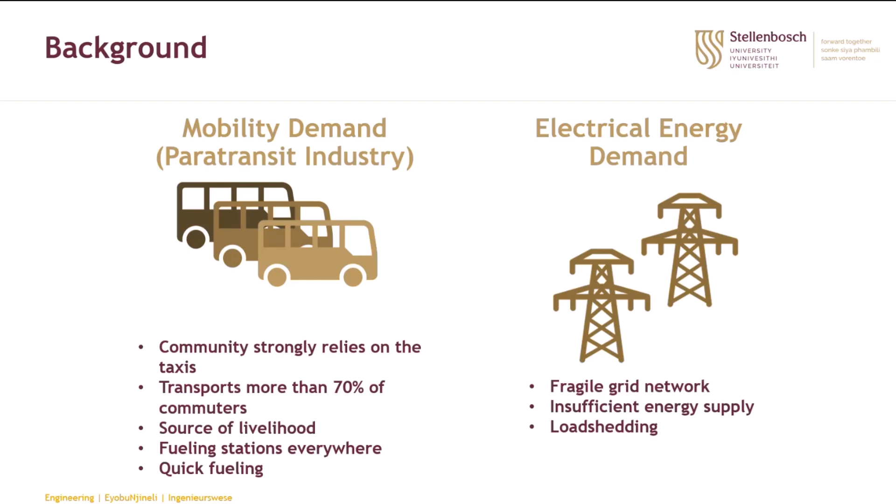When we consider electrification, these two systems that were once independent of one another now become dependent on each other through chargers specifically.

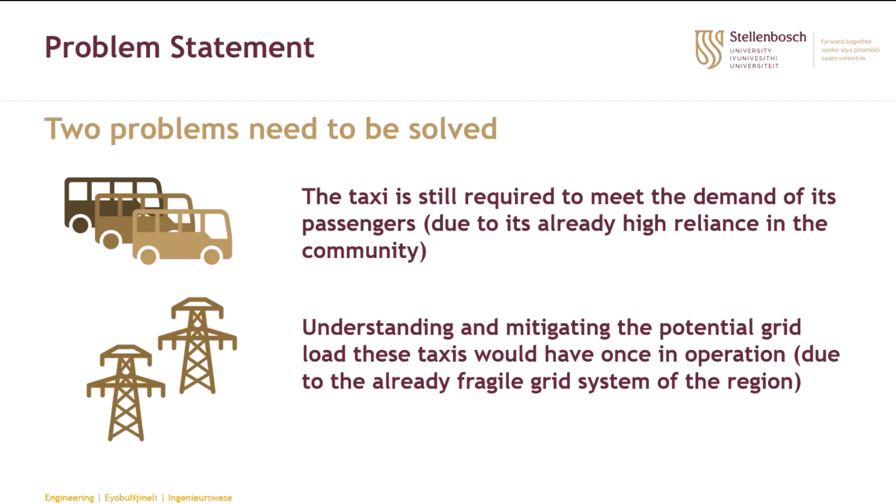This leads us to two problems that need to be solved in the electrification of paratransit. The first is that the taxi is still required to meet the demand of its passengers, because of its high reliance in the community. The second problem is understanding and mitigating the potential grid load these taxis would have once in operation, because the grid network is significantly fragile.

This leads to the PhD research question: what are the challenges and opportunities when considering the interdependence between mobility and electrical energy supply in the electrification of the paratransit industry?

So how are we going to answer this question? I've identified four key objectives. The first is to perform a literature survey to establish what has already been done in literature. The second objective is to develop and introduce a methodology for analyzing the viability rate of the electrification process, and to develop a simulation tool capable of this.

Having this viability rate included in the actual simulation. The fourth objective is to evaluate various factors that could affect such a system in electrification, such as number of chargers, charging rate, charging locations, and scheduled versus unscheduled mobility. Lastly, we derive conclusions and policy recommendations on what should be considered when the electrification of paratransit eventually goes forth.

This leads to chapter 2, which was published in a variety of articles and conference papers, and is summarized in this portion. It achieves objective 1, which is to perform the literature survey.

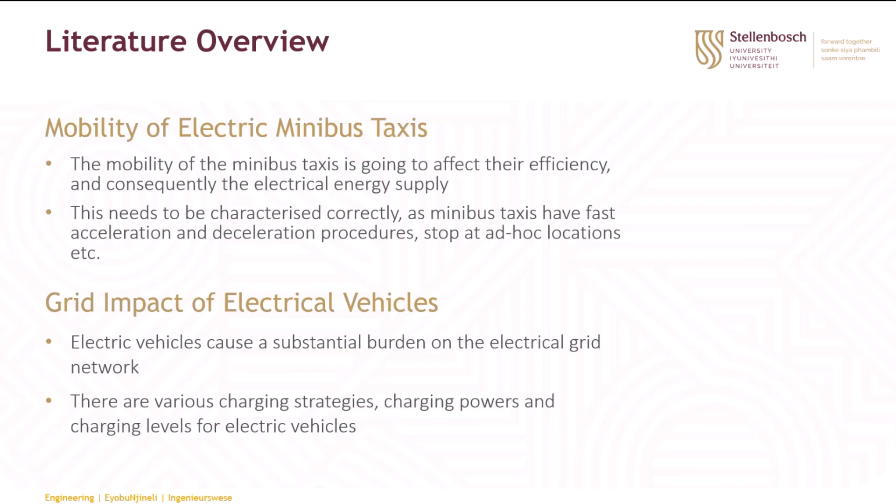If we have a look at existing simulations of mobility and grid, this is just a summarized version of everything. But there's been various studies that have focused on each of these key parameters, including scheduled versus unscheduled, different charging locations, different EV penetrations, etc. However, in these studies, not all of them are considered, and it's mostly just focused on one specific area.

However, what is key from the literature that I found is that the whole process of traveling and charging needs to be simulated in order to obtain a more practical prediction of what it will actually look like in the electrification process. Another key point is that the analysis for one country does not translate well to another country, and therefore it's important to do country-specific simulation.

So in doing the literature survey, two research gaps were identified. The first is that the analysis was largely done for the global north and not for sub-Saharan Africa. The simulations out there do not accurately represent the unique behaviors and complexities of the paratransit industry that we see in sub-Saharan Africa. So new methodology is therefore required to account for this.

The second gap is that investigating the integration of grid and mobility is quite a complex task. Some factors are included while others are not, such as number of chargers, charger location, charging behavior, etc. And so there needs to be a simulation tool that is capable of simulating electric paratransit.

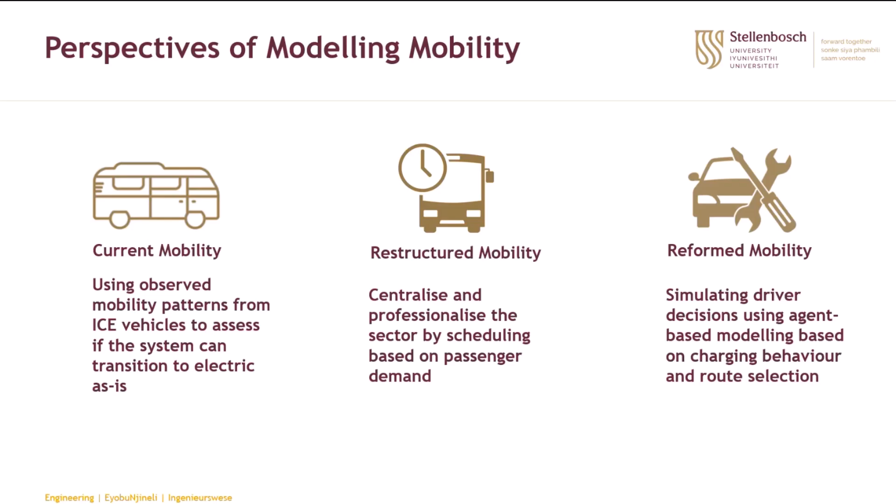So my specific research focused on the current mobility analysis. What happens if we take the system as is and convert it to electric? How does that hold up and stand? And the way we did this was through the introduction of what we call the vehicle day.

It's important to know that the taxi's behavior changes from day to day in the distance and the time that it travels. And this is completely different to buses, which have fixed routes and times in which they travel. So what we do with the vehicle day is, instead of just treating everything according to the trips that take place, we rather have a look at the overall day that the vehicle travels.

However, because charging takes so long, we can't just have the day be a normal calendar day from 12 o'clock until 12 o'clock. We rather shift the vehicle day from 4 o'clock until 4 o'clock of the next day to account for the home charging in the evenings. And so this vehicle day concept is able to contain the whole mobility of the taxi, or the whole movement of the taxi, within a given day, instead of just having the normal trip-specific information.

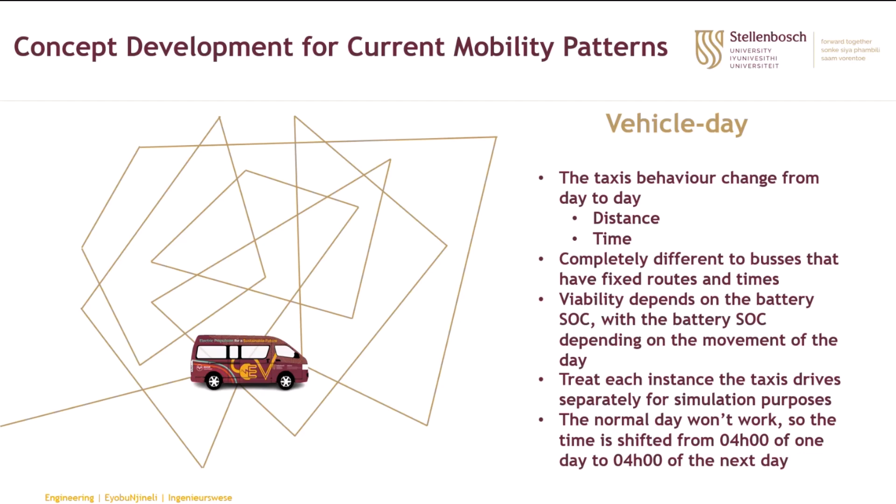However, when we have a look at this further on a more macro level, we see that there's actually multiple vehicles active on a single day. And because of electrification, these vehicles end up sharing a resource which is the number of chargers, which becomes scarce. And so these vehicle days are not entirely independent of one another, but become dependent on each other based on the number of chargers at a specific location. And so we term this grouping of vehicle days that drive on a specific day as a fleet day.

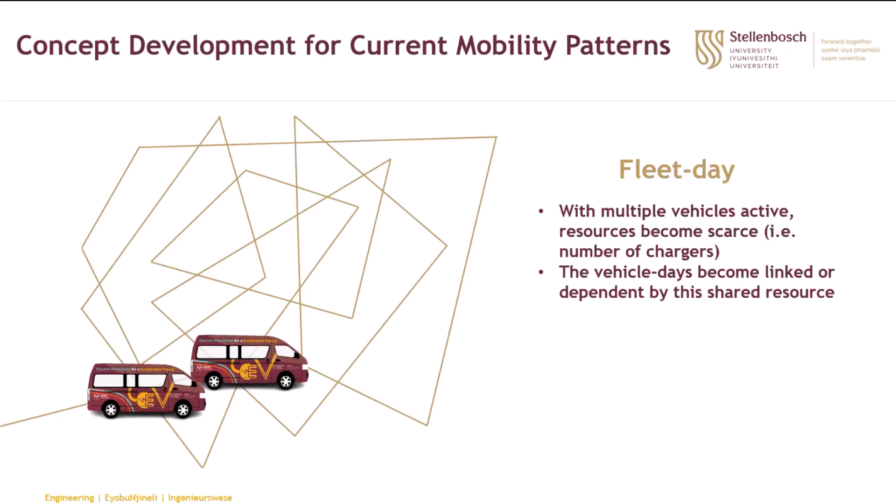And what the fleet day allows us to do is determine the grid impact that we can expect from these electric minibus taxis.

So when we come to the data specifically for this, we had received data for 17 minibus taxis that were tracked over a month.

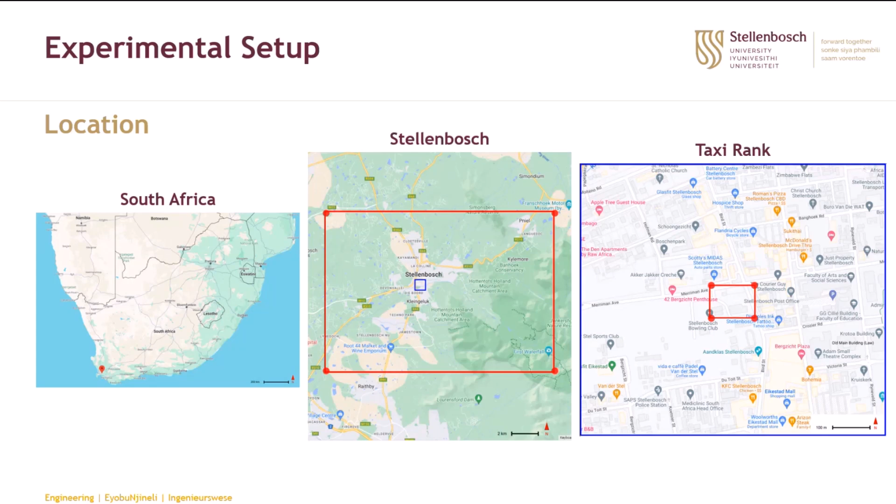With regards to the data from the 17 taxis, if we just included the operational days in terms of weekdays, as well as excluding the days the vehicles were not driving, we ended up with a total of 290 vehicle days. Simplifying that further, we ended up with a total of 220 vehicle days.

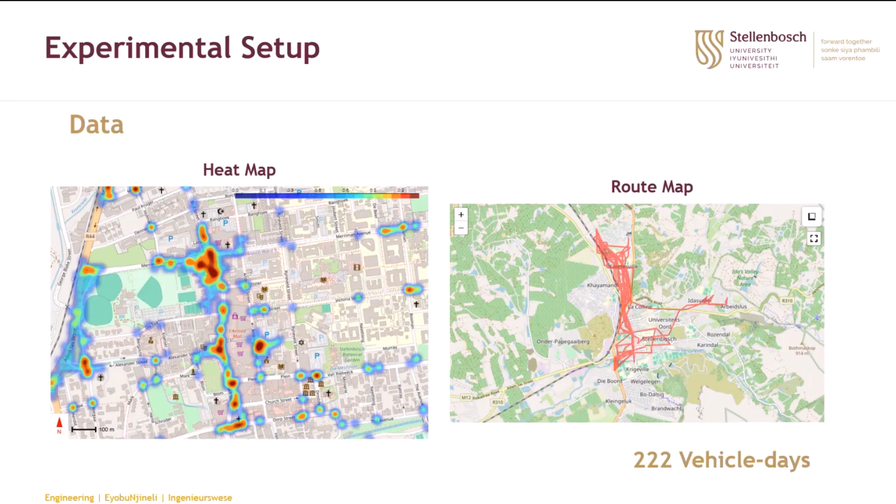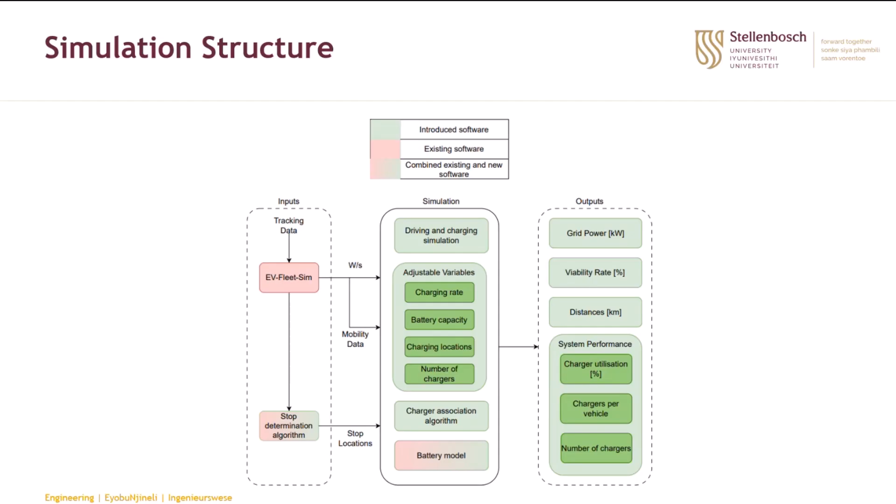And then I made use of an existing battery model with some variations within the simulation. And on the right you are able to see the various outputs.

Some of the outputs, when you have a look at it, the two key ones are the grid power measured in kilowatts, as well as the viability rate in percentage, which just means how viable is the transition going to be - how many minibus taxis will be able to be converted to electric, in terms of a percentage.

Then some other smaller metrics we're able to determine are distances, in how far they can travel in a given vehicle day in terms of kilometers, as well as the charger utilization in percentage and number of chargers per vehicle. So this then leads us to the results.

The results were published in mainly two journals, being the Energy for Sustainable Development Journal, as well as the African Transport Studies Journal. And this work completes objective 4, which is to evaluate various factors of the system.

So in the next slide, I'm going to show you what the simulation looks like. But before that, it might go very quick, so I want you to just notice that the SOC of the vehicle starts at 100%.

What we have over here is the various vehicles actually driving and charging on a given vehicle day, or on a given fleet day, with each line representing a different vehicle. The downslopes represent the vehicle driving, with the upslopes being the vehicle charging. What is shown here is the SOC of the battery throughout each iteration.

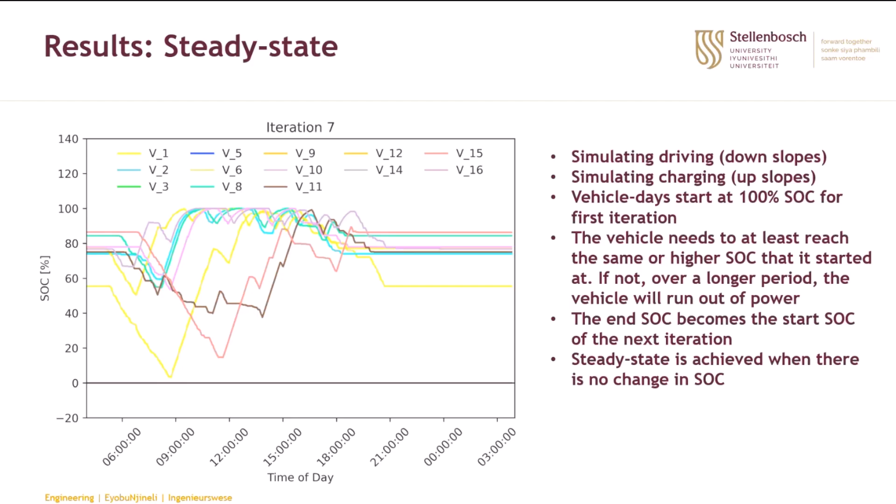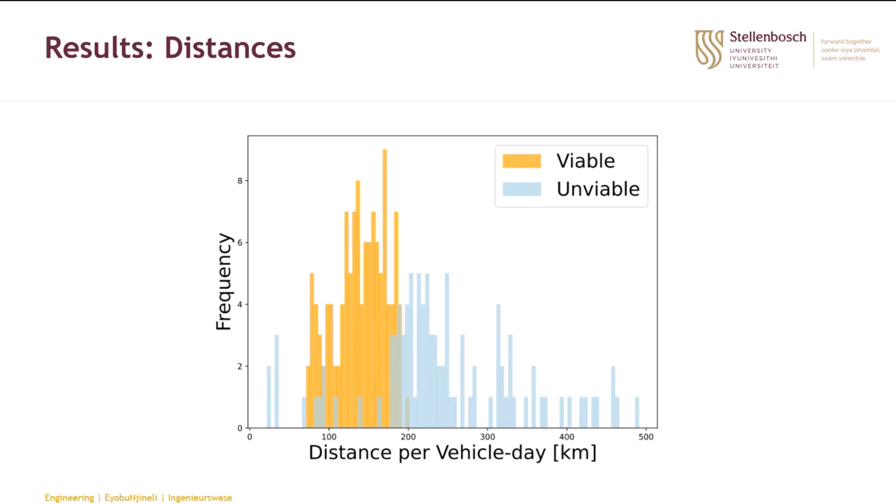One of the other outputs of the simulation is the distances. This is just an example of what the distances actually look like, where the viable vehicle days are shown in orange and the unviable vehicle days are shown in blue.

From the simulation, we get two types of distances. The first is the distance that can be traveled in a vehicle day given sufficient charging, and the other is the limit of the actual battery being 140 kilometers that a vehicle can travel in a single trip without needing to recharge.

Then quickly, if we just have a look at the current actual electrical grid situation in South Africa, for increasing numbers of EVs, we see a pretty alarming scenario.

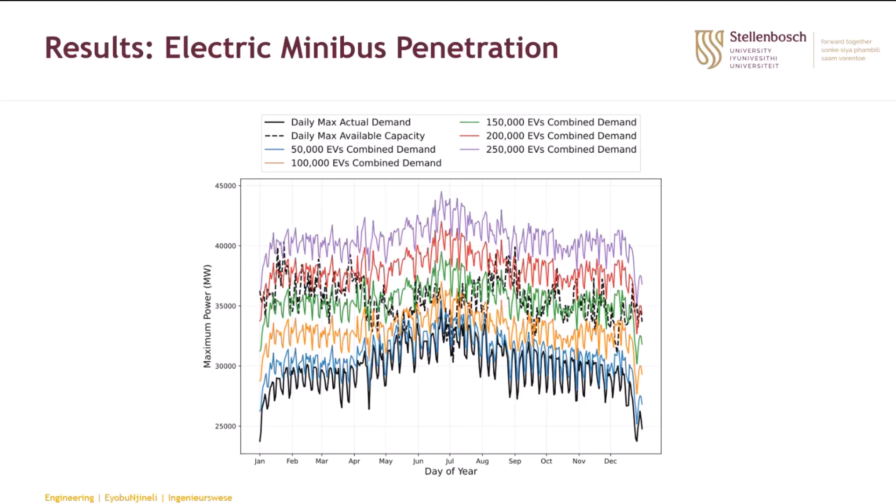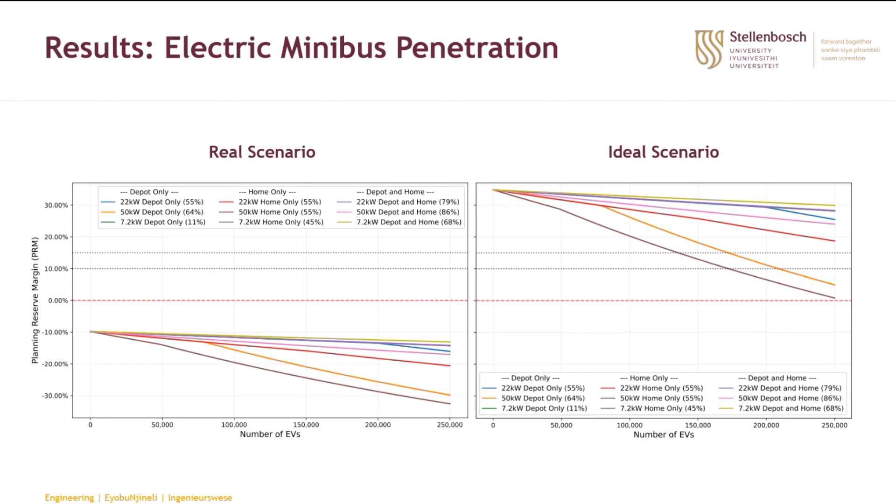So for the actual scenario in South Africa, we would not be able to have any electric minibus taxis on the road. However, if we take the ideal scenario where the installed capacity matches the actual capacity of South Africa, we see a very different story: slow and medium charging is pretty sustainable. However, fast charging, seen by the brown and orange, will actually quite substantially negatively affect the grid.

This was an interesting side note: we tested what happens if we increase the battery capacity, and we found that increasing the battery capacity does not provide as much benefit as including home charging. So rather than trying to get more out of the battery, we should instead install home chargers.

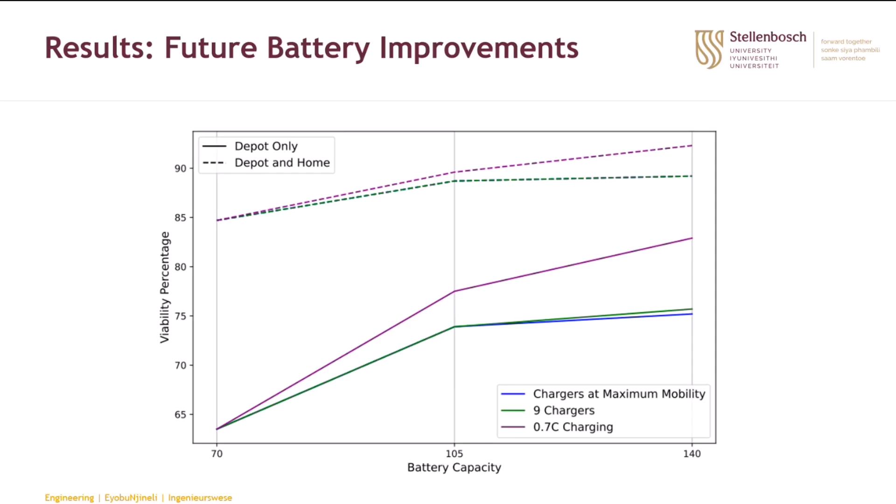So one of the key discoveries of the first part is that the mobility of the taxis would need to change in order to achieve higher viability rates. That led us to chapter 5, the restructured mobility: what happens if we change the vehicle's behavior to a more scheduled nature? This was published in the Journal of Cleaner Production and still addresses objective number 4.

With this introduction, we added to the methodology and framework through the use of a vehicle trip. The vehicle trip allows us to ascertain the perceived passenger demand of the taxis based on how long they stopped at a specific location, with the assumption that if the taxis have stopped, there are no passengers in it, meaning they're not actually driving. So we're able to term this mobility between stop locations as the vehicle trip.

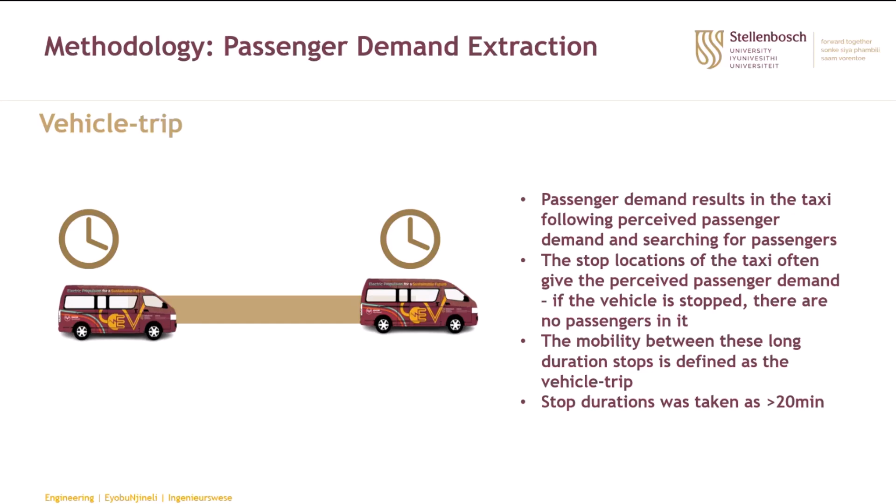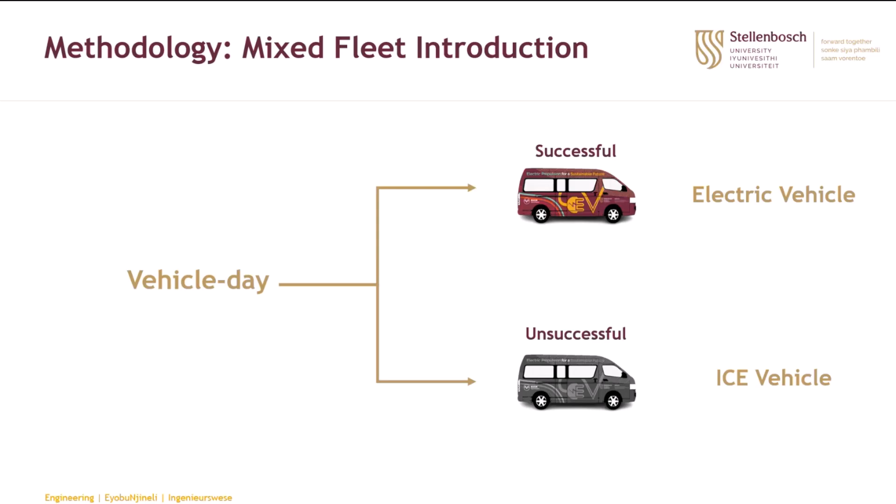Another interesting thing we introduced here is the concept of a mixed fleet, where we take the vehicle day and instead of representing it as a viability rate, we look at whether the vehicle day was successful. If it was successful, that vehicle becomes electric; if it was unsuccessful, it becomes an ICE vehicle.

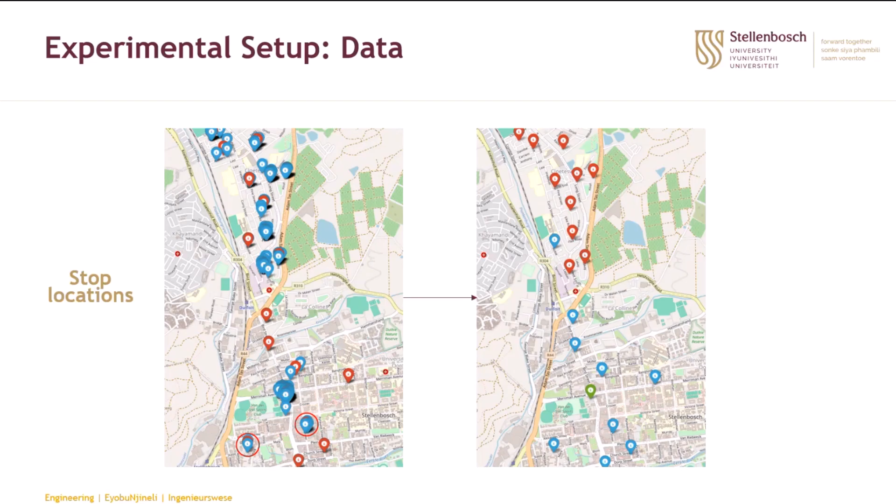When we look at the experimental data, I made use of the same data set as the previous chapter, and these are the various stop locations. You can see quite a few stop locations, and I did a kernel distribution with a radius of around 150 meters to get fewer points while still maintaining an accurate representation. This resulted in about 1,007 vehicle trips from the data set.

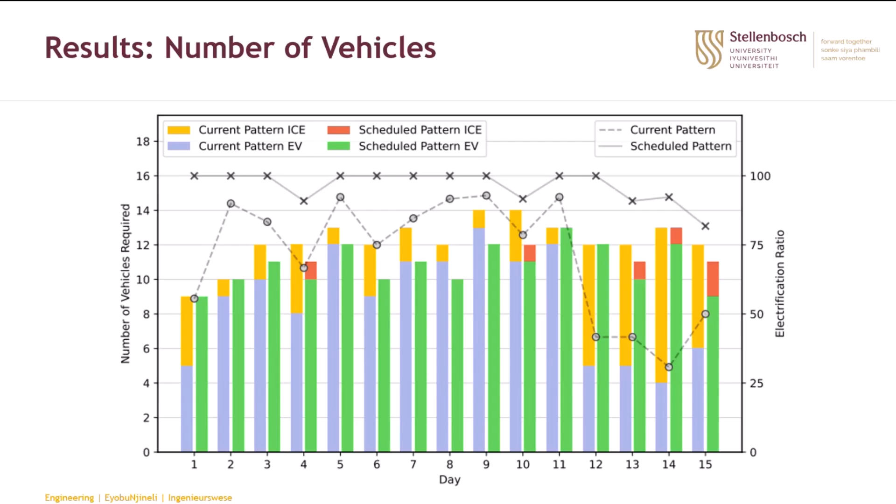If we look at the results, this shows the current pattern versus the scheduled scenario where we've restructured it. You can notice that in the restructuring, we actually make use of far fewer ICE vehicles and far fewer vehicles in the fleet as well.

The same kind of pattern is seen in the number of chargers, where far fewer chargers are needed in the scheduled scenario, with the current mobility requiring substantially more chargers.

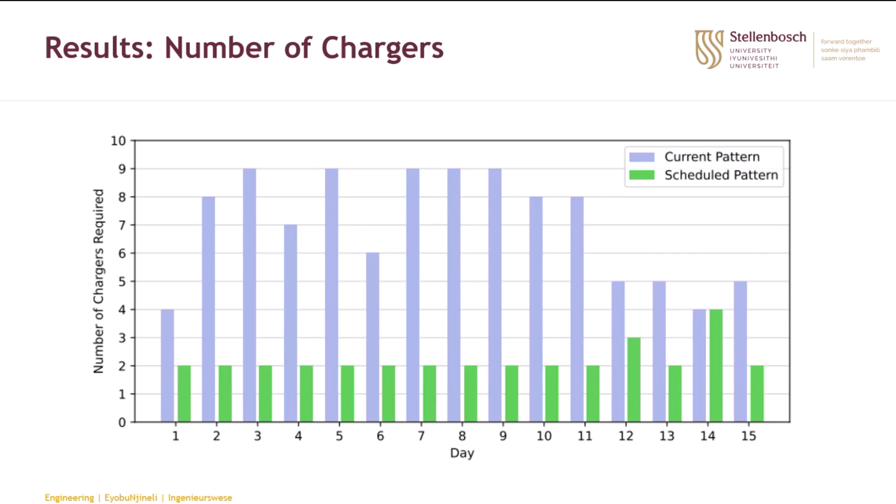Then on the distances, I want to draw attention to the right there with the EV and ICE combination. We can see that the scheduled scenario actually has an increase in distances, and this is because of what is called dead bands introduced when the vehicle travels between depots or between locations to pick up people, so distances are actually added.

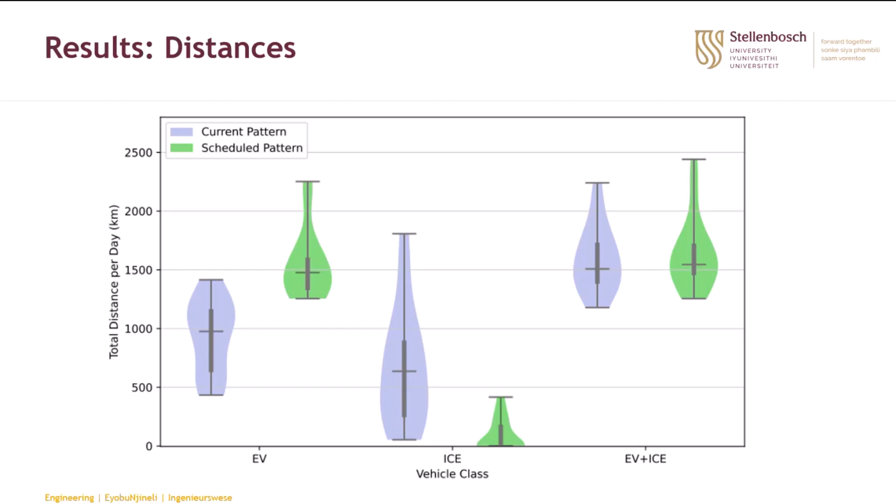Then we can look at the grid impact, with blue being the current and green being the scheduled scenario. You'll notice that the green, or scheduled scenario, is actually pretty flat and substantially less than the current mobility. However, it is spread out throughout the day.

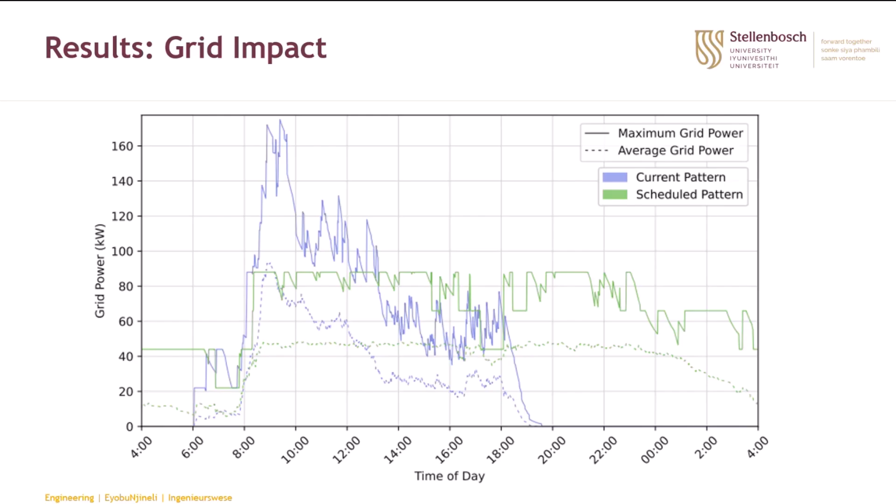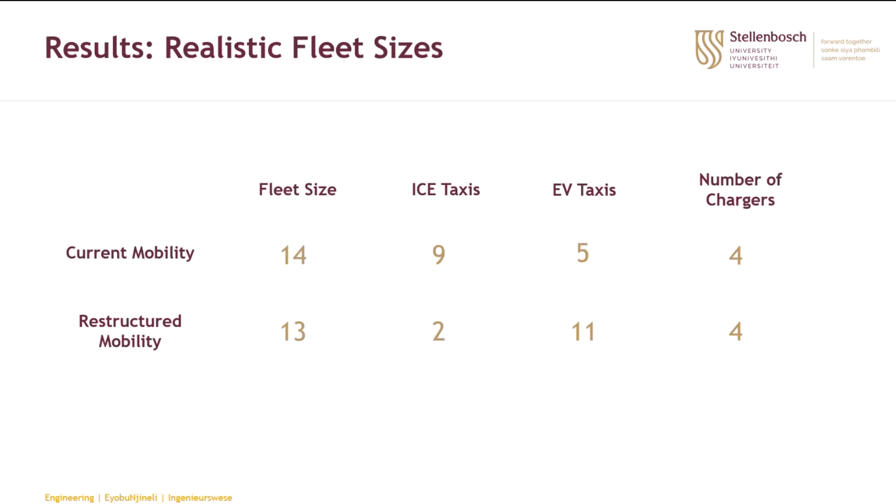If we look at the actual fleet sizes for the scenario we analyzed, we can see that the restructured mobility makes use of fewer vehicles and more electric vehicles as well, so it has a higher system performance.

Another scenario we found during the research is the concept of a just energy transition, introduced in these policies in terms of how just, or how easy, people's access is to the benefits of electrification. This work was published in the Energy Research and Social Science Journal and still continues to evaluate objective number 4. So just a bit of background.

A just transition, like I said, is a guiding principle in climate change policies. But how do we actually go about that from the driver's perspective, or the vehicle's perspective, in a just energy transition? The way we do that is through the vehicle day classification.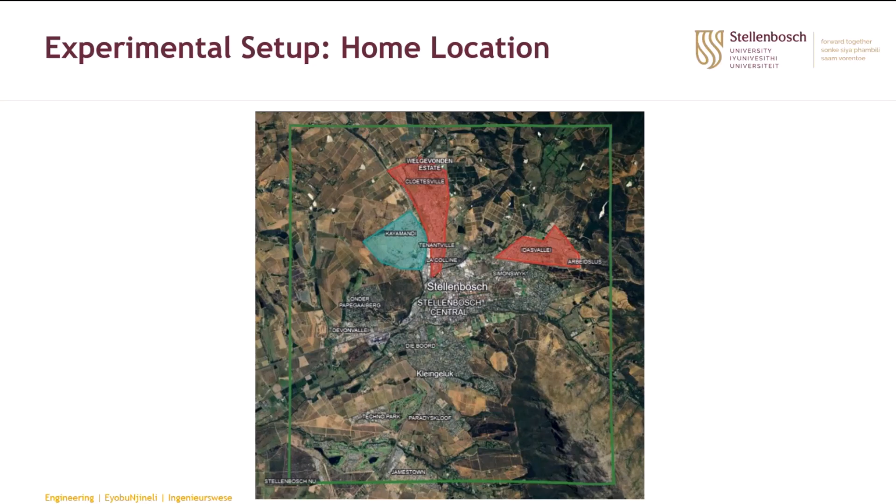So to show what that looks like, if we have a look at the historical background, Group A, being those in Cloetesville in red, are actually people of lower middle income, and it's a historically colored community. Whereas Group B, Kayamandi, are people of lower income and a historically black community as well.

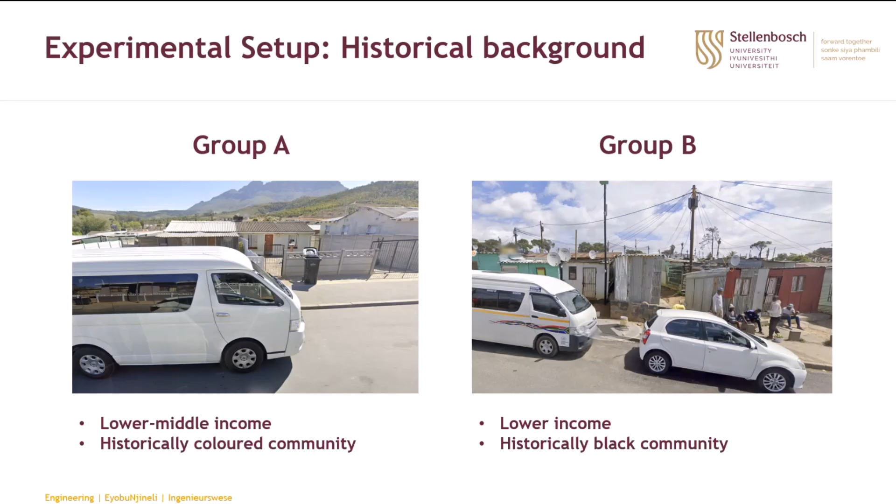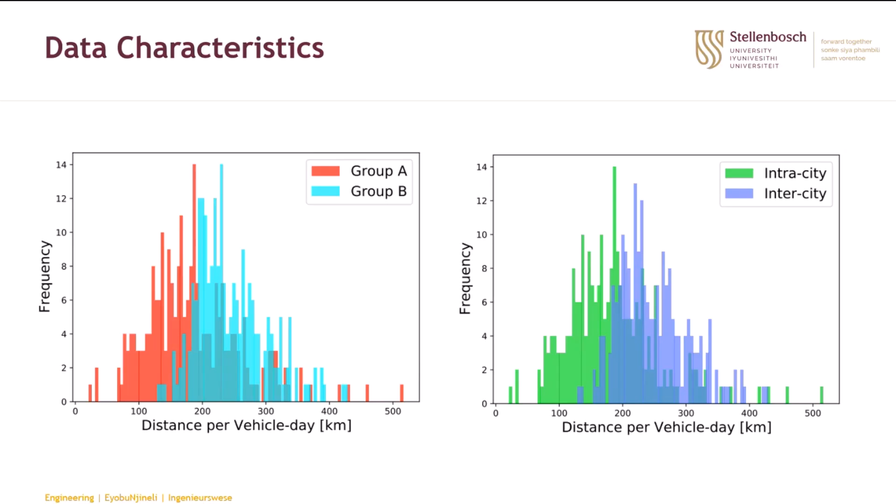Some of the data we found is that Group B actually travels a lot further than Group A, because they perform a lot more intercity than intracity trips, meaning they travel from Stellenbosch to Somerset or Stellenbosch to Bellville, outside of municipality jurisdictions. We also found Group B has substantially higher energy consumption than Group A, because of higher traveling speed, and they're traveling more on highways as well.

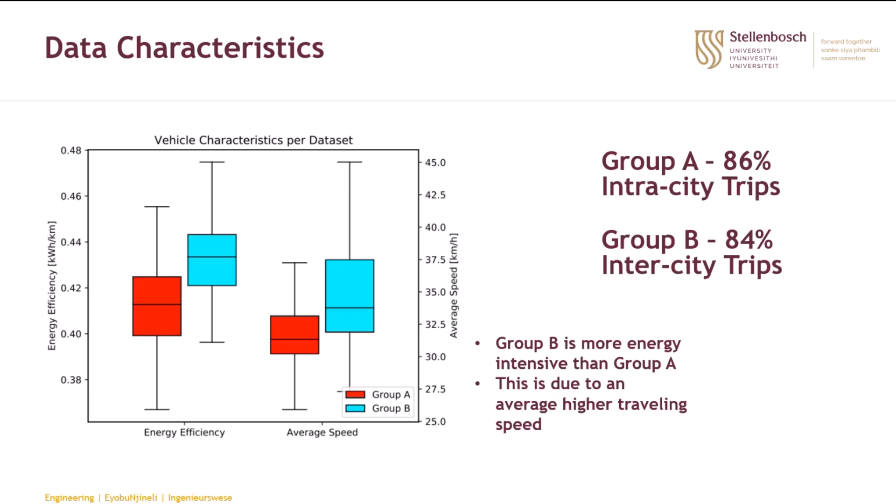So just some more stats. Group A has 86% done through intracity trips, with Group B doing 84% of intercity trips. When we look at the viability rate, we see that Group A has a viability rate of 53%

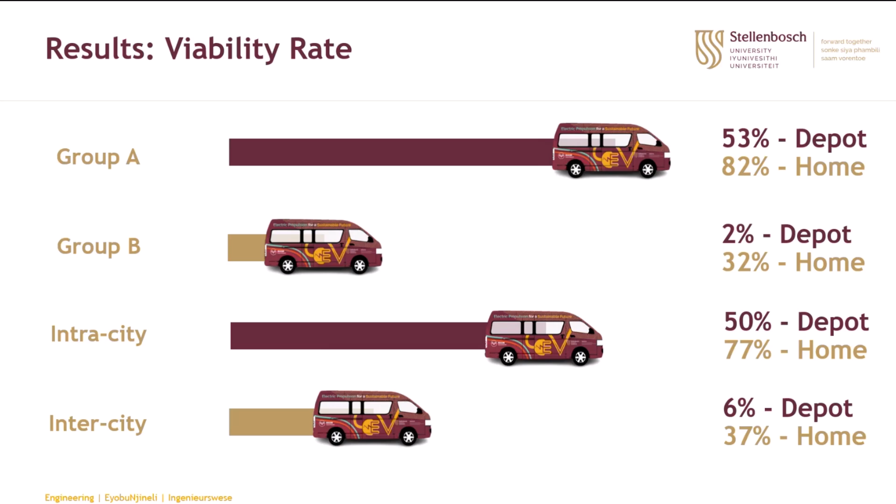for the depot-only charging scenario, but this increases to 82% if we add home charging. However, Group B is substantially lower, only having a 2% viability rate for the depot scenario and 32% for the home charging scenario. The same can be said for intracity and intercity trips, which shows that intracity trips are more viable for electric vehicles than intercity trips.

As well, from that, you can see that the electrification transition would affect one group, or be better for one group than the other group.

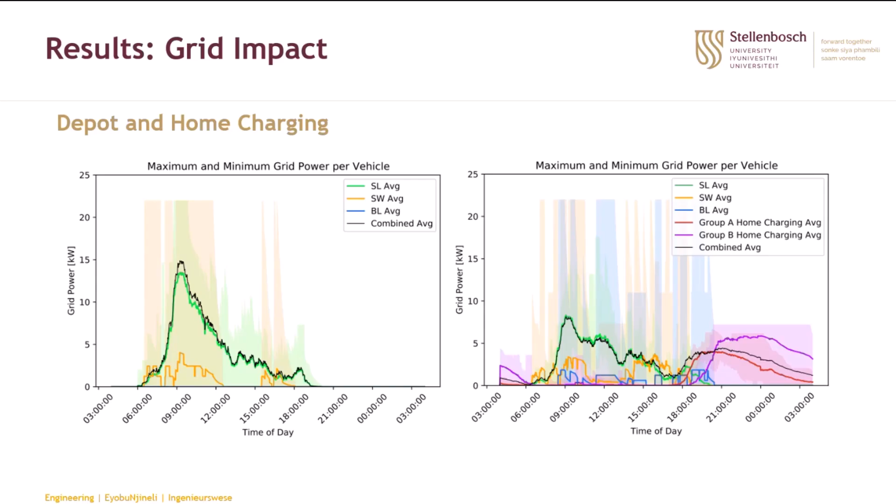Then again, we can model the grid impact. Something of note here is that Group B, the people in Kayamandi, actually get home later and start charging later, shown by the purple line on the right compared to the red line.

Finally, to summarize everything up and have a look at the conclusions we're able to draw from all of this research, there are a couple of conclusions.

With the fact that mobility needs to change in order to achieve higher viability rates, home charging is a serious consideration. There are two types of distances, and the grid impact we can expect during the day, as well as the fact that electrification can benefit one group and conversely affect another group.

Finally, just to highlight the original contributions of this research: classified the ways of simulating electric mobility for sub-Saharan paratransit, the current, restructured and reformed mobility, presented a methodology for assessing the viability rate of an electric transition through the vehicle day and fleet day concepts, as well as developed simulation software for the viability rate.

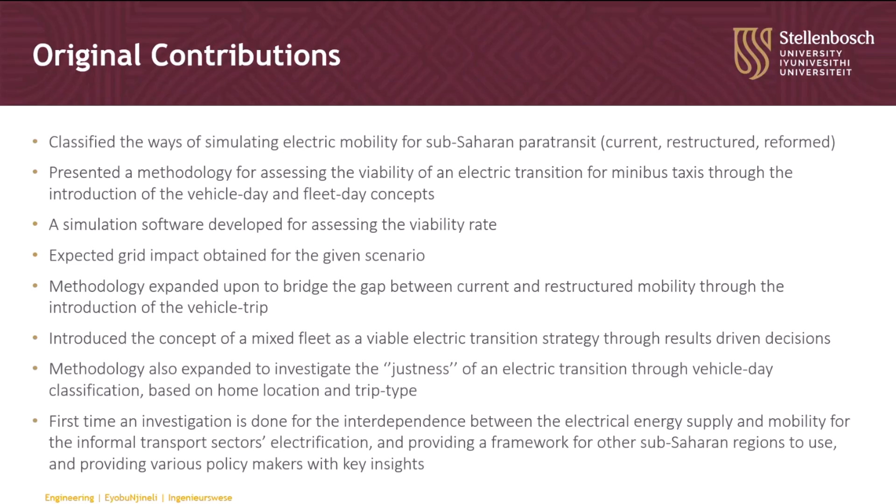We were able to obtain the expected grid impact, as well as expanding on the methodology to bridge the gap between current mobility and restructured mobility. We introduced the concept of mixed fleet as a viable solution to electrification, as well as investigated the justness of the electric transition. Finally, some future research that needs to happen.

A deeper level grid impact analysis should be performed. My research focused very much on a high level, but you can go into frequency analysis, voltage analysis, transformer impacts and everything, as well as exploring more offsets of the grid impact with the use of stationary batteries and solar panels, the effect time-of-use charging will have, adapting driver behavior in terms of range anxiety, and performing an analysis on a larger data set as well.